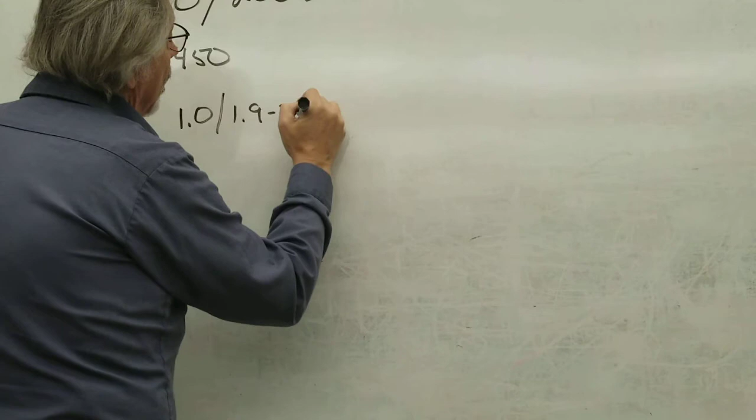3450 RPM. Okay, the RPM is 3450, okay. What else we got on there? Amps is 1.0 slash 1.9 to 2.0. Okay, so the amps are different because depending on the voltage you're wiring it to, the amps are gonna go up. That makes sense. Higher the amperage, the lower the voltage. Higher the voltage, the lower the amps. Ohm's law. Yeah, Ohm's law. Okay. That is correct. What else you got on there?

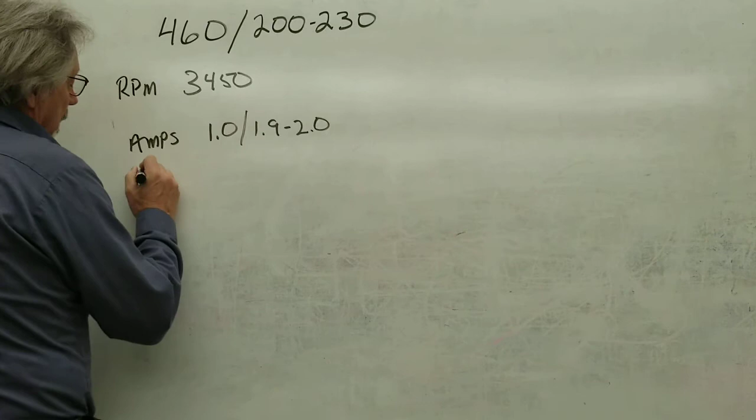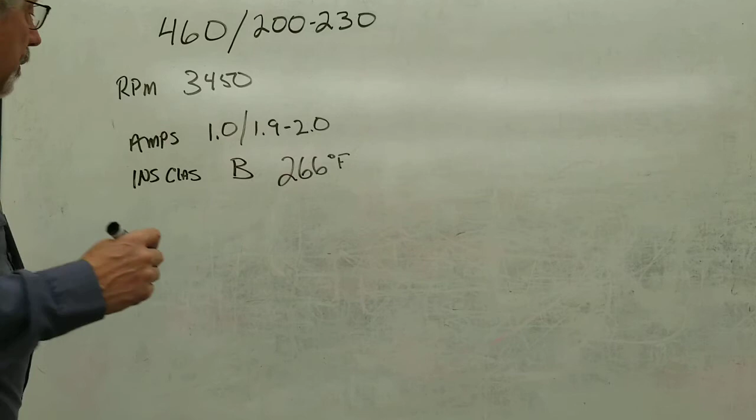Class B insulation. Oh, look, Class B. Seeing all that stuff there. Class B, huh? So what's the temperature? What's the maximum temperature on Class B? It's 266 degrees Fahrenheit. Okay. What else we got on there? Says half a horsepower. Half horse? Yeah, half a horsepower. 1/2. Okay. Anything else? What else would be important on here?

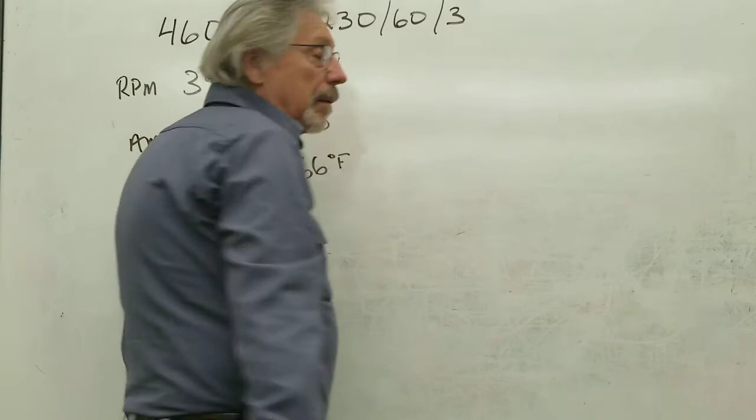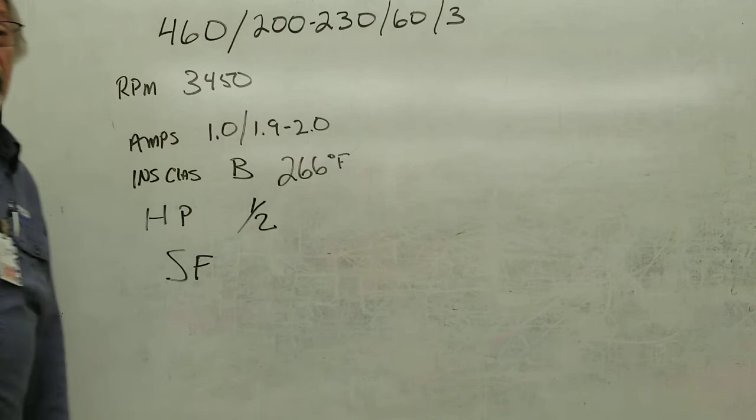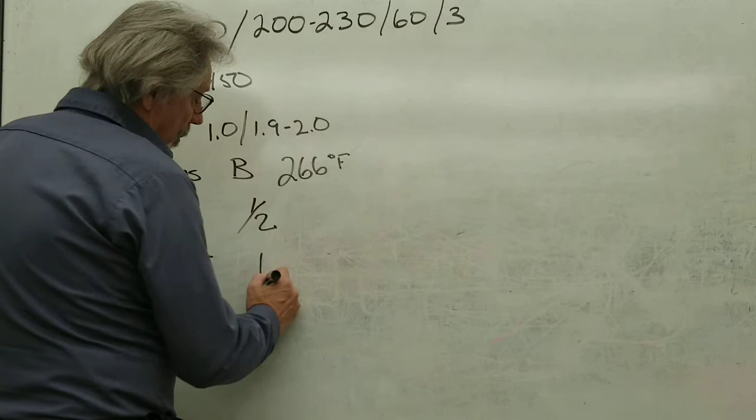I don't know. Got the insulation class, got the service factor, got the what? This would be a three-phase regular. This right here, let's see, yeah, that. I think one of those. And then 60 hertz. 60 hertz. Slash 60 slash 3. How's that? Is that better? Yes. Service factor on there? Should be. What is the service factor? SF. 1.60. 1.6? Yeah, 1.6. Okay.

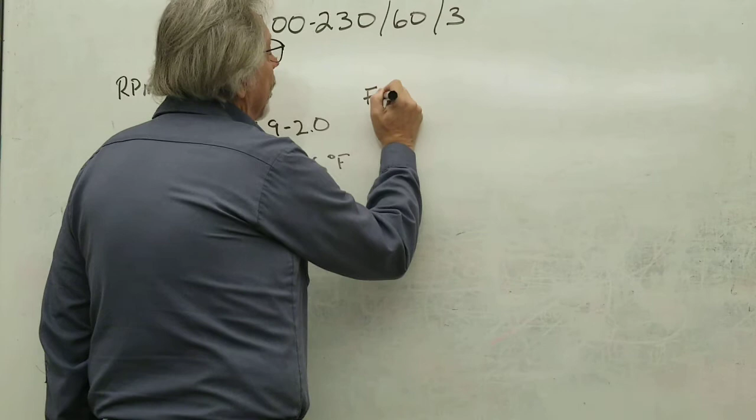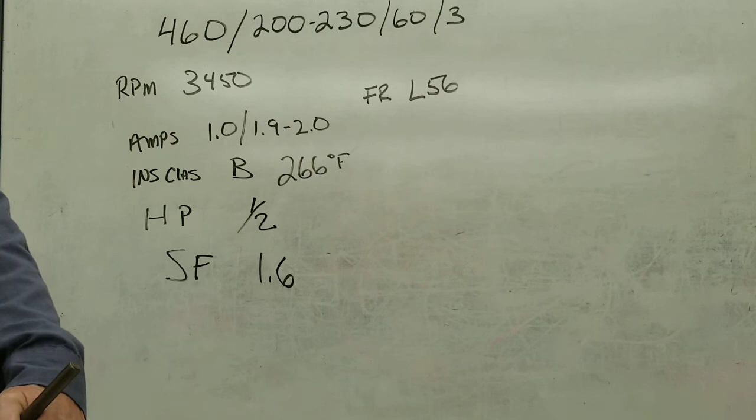You find enough stuff on there? The frame size on there? Was that 56? L56. Says FR. Frame is L56. Frame L56. Anything else on there? Okay. That good? You got a lot of information over there? Yeah.

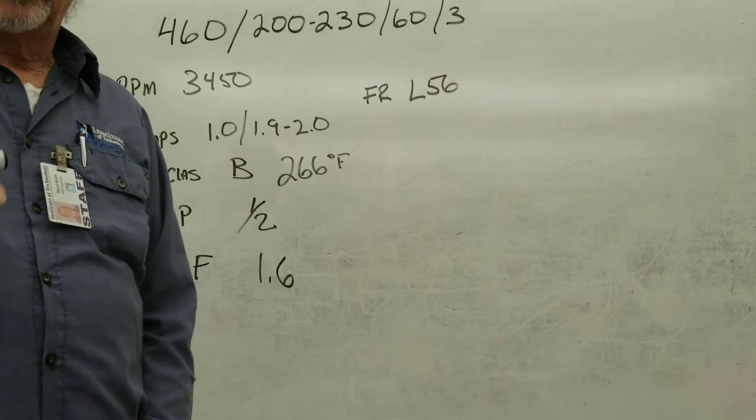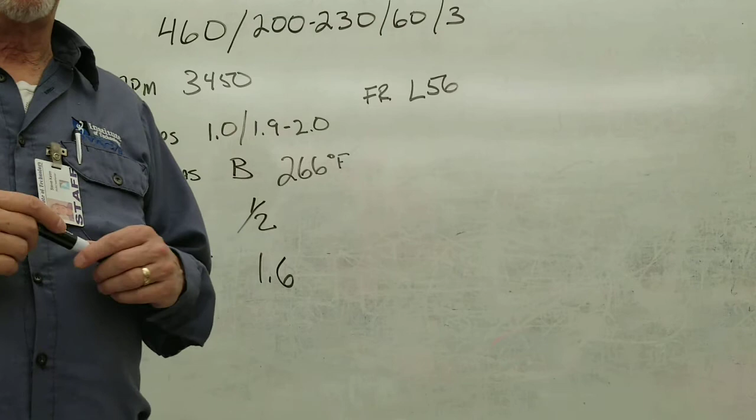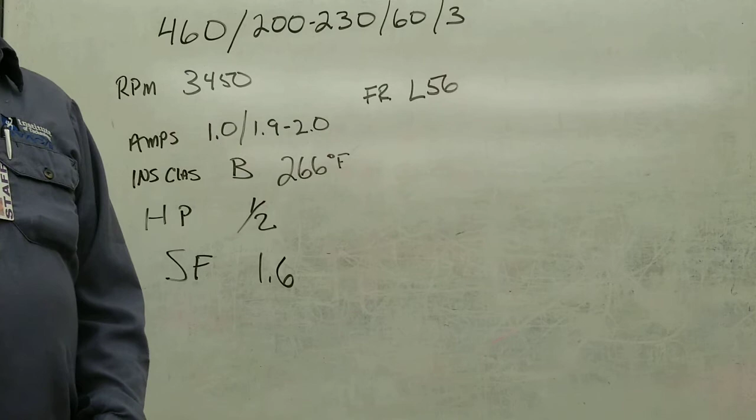Okay, so the frame size, 56, so the 56 frame motor, the dimensions on that motor are up there on that chart back there. So every motor has a frame size, that frame size tells you what size the shaft is, how big the motor is, how tall the motor is, the bolt pattern on the motor, how long the shaft is, all that stuff, and all the measurements of that motor are on that frame size. So that's for mounting. It tells you everything on that motor that you need to know as far as the mounting. Now, as far as the electrical characteristics, that's where we come into the voltage, the RPM, the amps, insulation class, the horsepower, and the service factor.

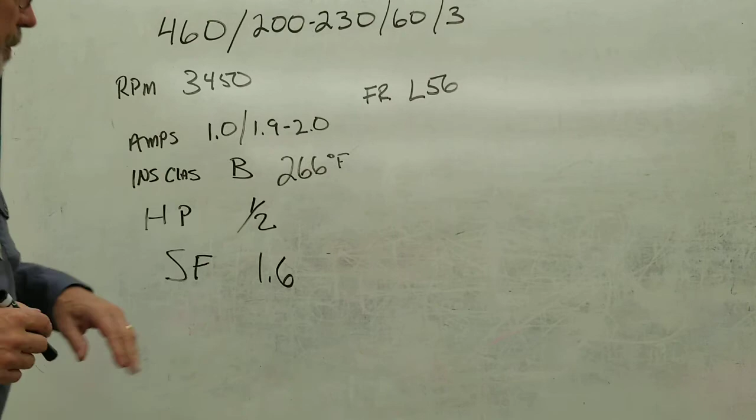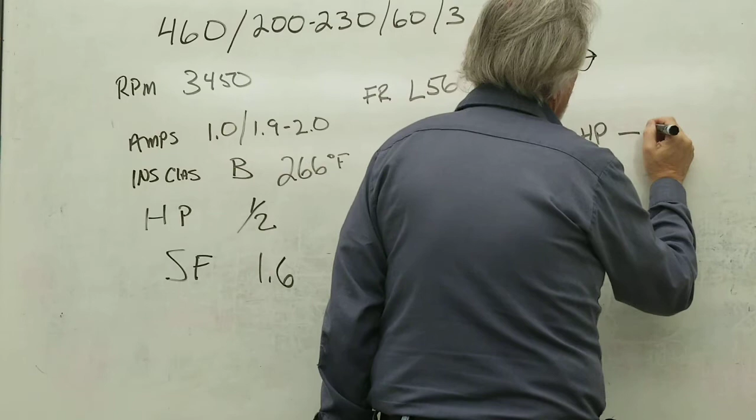Now, the service factor is the reserve horsepower. Reserve horsepower is the service factor, the SF. Okay? So let me explain this to you. If you're gonna replace that motor, you got all this stuff and you matched everything up, but you did not think to look up the service factor, and suppose it was like the one that was on the PowerPoint, 1.0. So when you buy that new motor and stick it in there, it's not gonna stay online. I know, I've done it many times. Okay.

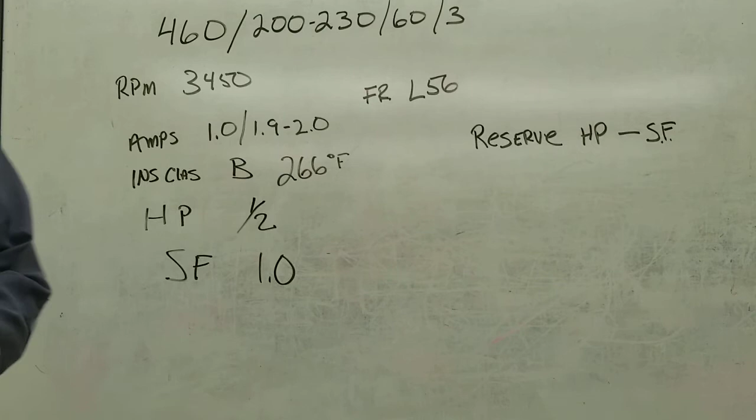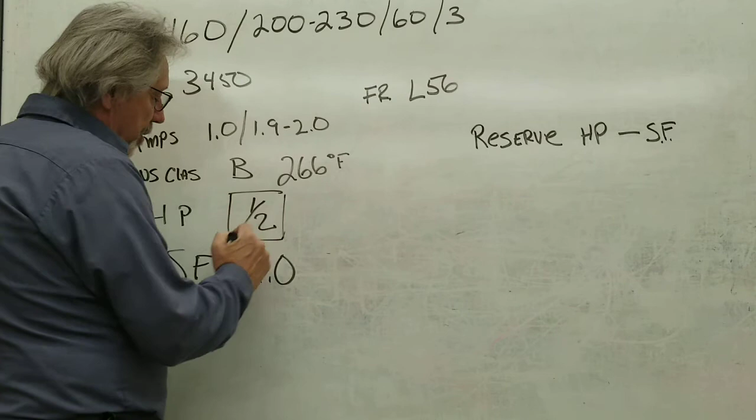Air conditioning manufacturers will do this purposely. They'll purposely put in a motor that you can match everything up, but your motor that you matched up is not gonna work, because they want you to buy the motor from them. Okay, makes a lot of sense. So the service factor, the reserve horsepower, what's our horsepower? Half horse, here it is, right here, half horsepower. So that means the one you put in is a half horse. Guess what the one you took out is? You don't have to guess.

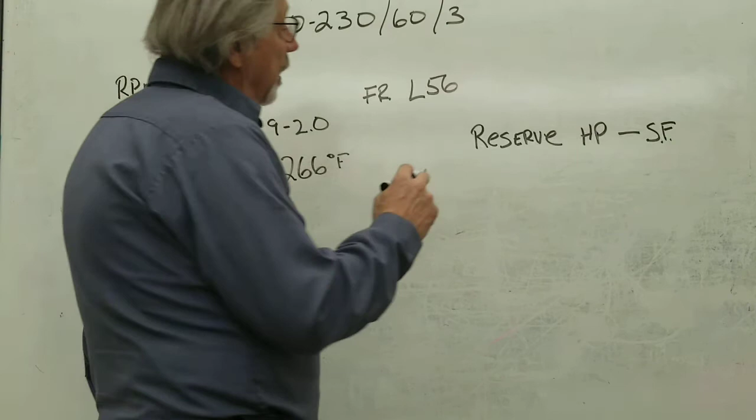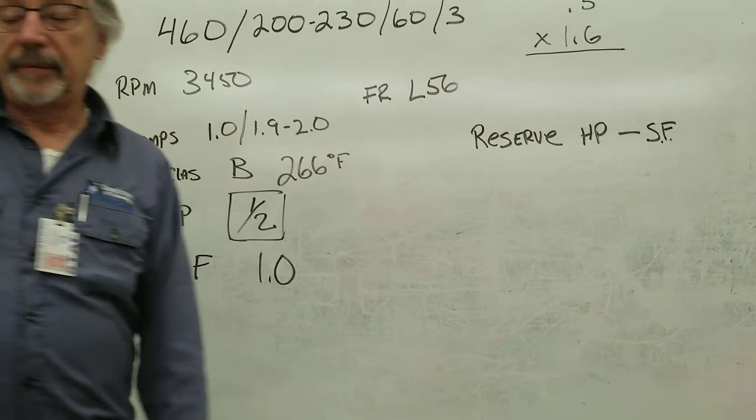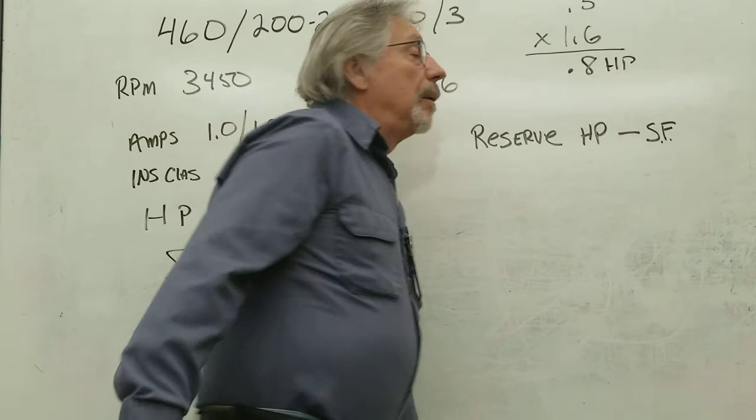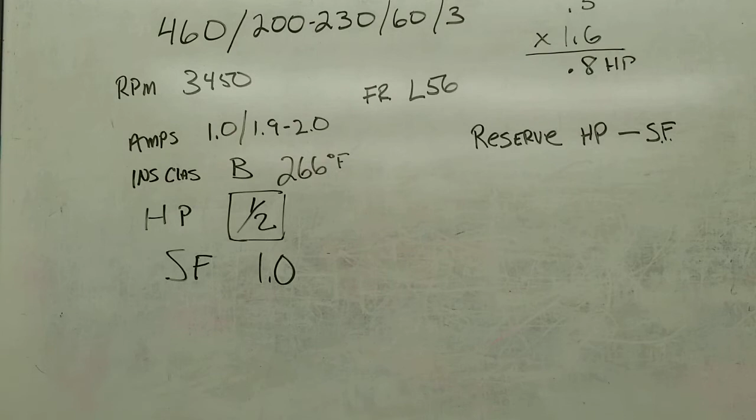Your 1.6 times 0.5 is equal to what? 0.8. 0.8 horsepower. Okay, so that motor that's floating around here is a 0.8 horsepower. So what are we gonna replace that with? 0.8 horsepower? They don't make 0.8. 3/4? 3/4, huh? I'm not sure. I'm just spitting out numbers right now. So 1 horsepower? 1 horsepower. Because what's a 3/4 horse?

0.75, right? Okay. So you're still a little bit under if you went 0.75, right? Yeah. So you want to go to a 1 horse to replace that half horse motor that you took out. Isn't that amazing? Would that be fine doing it with other stuff too, or is it just with smaller horsepower motors? No, it's actually bigger motors too.

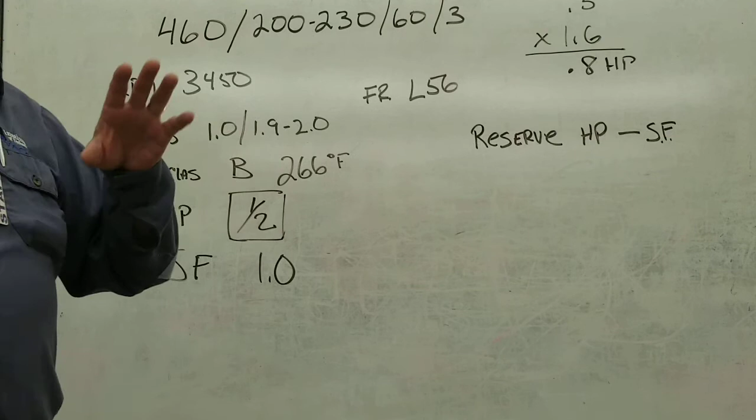A lot of times, like I said, they won't specify on the motor, because when the unit manufacturer says to the motor manufacturer, I want to order 10,000 motors, and these are the specifications I want on this motor. I want them to be half horse, but I want a service factor of 1.6 or 1.5. That's the service factor I want. I want this voltage, I want this. And they'll do that.

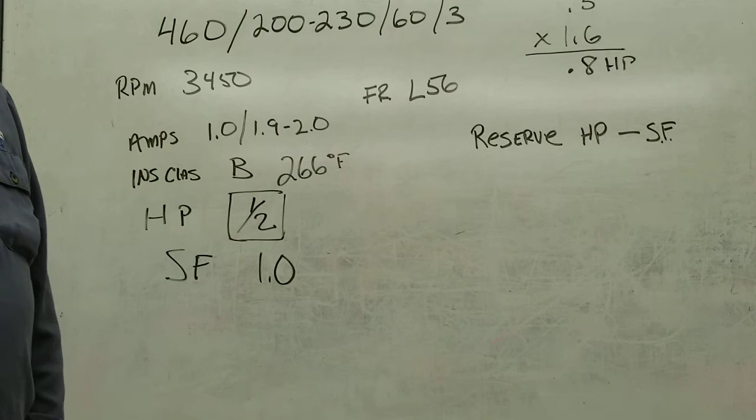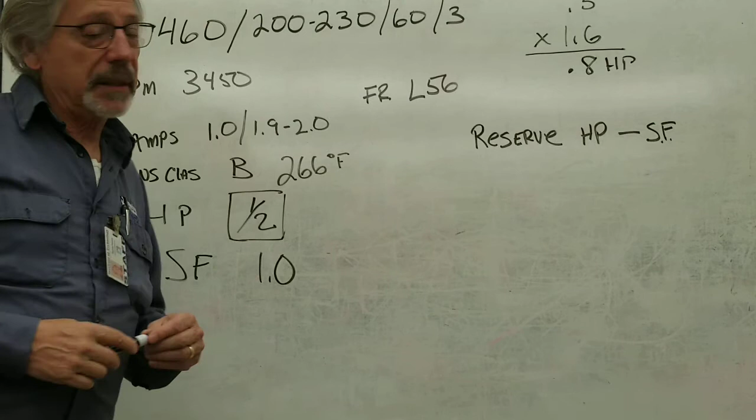And so when you go to replace that motor, unless you get the service factor, and unless it says on there the service factor, you're going to run into problems with that. Big problem. Because they want you to buy their $300 motor, when you can go down and buy a half horse for $60 aftermarket, right? And this has happened to me where it was actually a 5-ton Trane unit over,

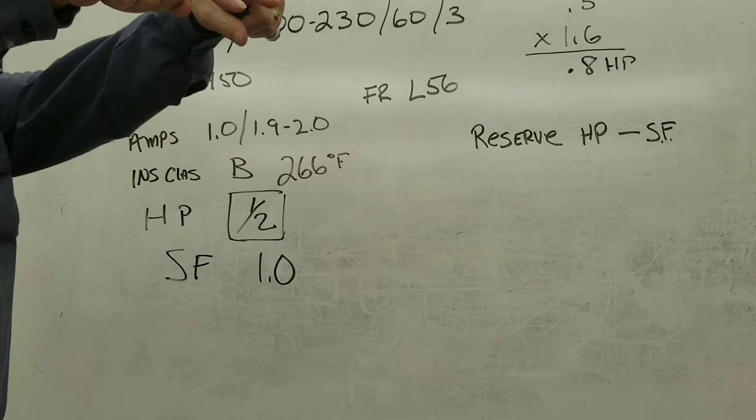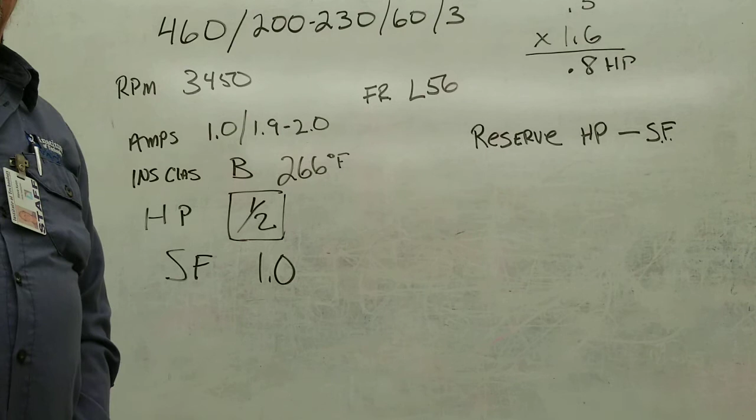Okay, so I was there one day and I checked the motor, it was burnt out, and I go, oh, okay, it's a Trane unit, whatever. It was a 3/4 horsepower blower motor, so I went and got a 3/4 horsepower blower motor in town. I was back there the next day. Same thing, motor was hot, wouldn't stay on because it went off on the internal. Well, I take it out and take it to a motor shop and say, what is this?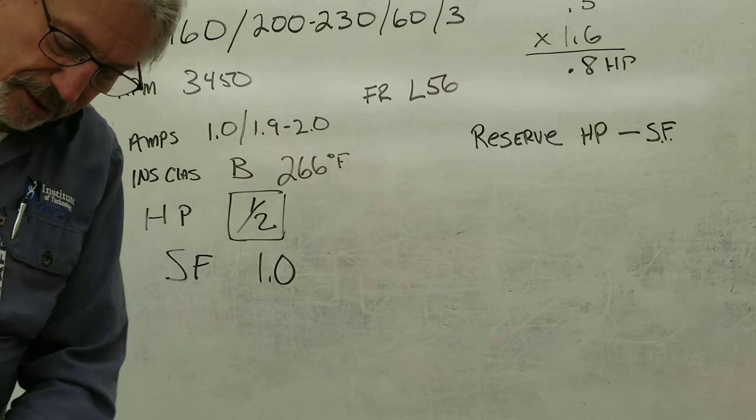He pulls it apart, looks at it and goes, well, what you have here is a heavy duty 1/2. I said, well, what does that mean? He goes, it's heavy duty. Do you have one? He goes, no, I don't have one with that size shaft. You're going to have to go with a 1 horse to replace it. But finding one with a 1/2 inch shaft is going to be a problem. Most 1 horses have a 5/8 inch shaft. So it's not going to fit the wheel. And maybe it's bigger too, it may not fit in.

Okay, let me check around on this. So I went to another motor shop and said, do you have a motor with this specification? I need a 1 horse with a 1/2 inch shaft, this many RPM, all this stuff. And he goes, let's look it up. He finally found one, and the motor was about $165. By the time I've already gone to this point, I said, you might as well just give it to me then, I'll take it.

So I go back and put that motor in, and I did it just out of spite, because of Trane's proprietary nonsense. Trane is like Apple. So I replaced it with a 1 horsepower, but their blower motor, if I would've bought it from Trane, would've been 300 something. So I really didn't save any money, because I'd been out there a couple times already. But I knew that, I was going to go for it anyway. It took me a while, but I got it done. Okay?

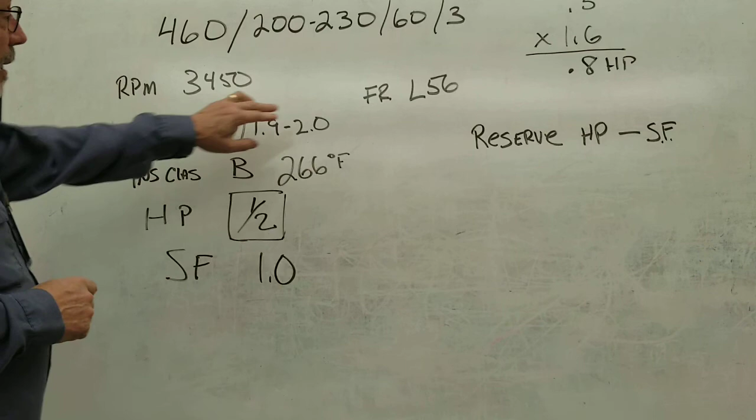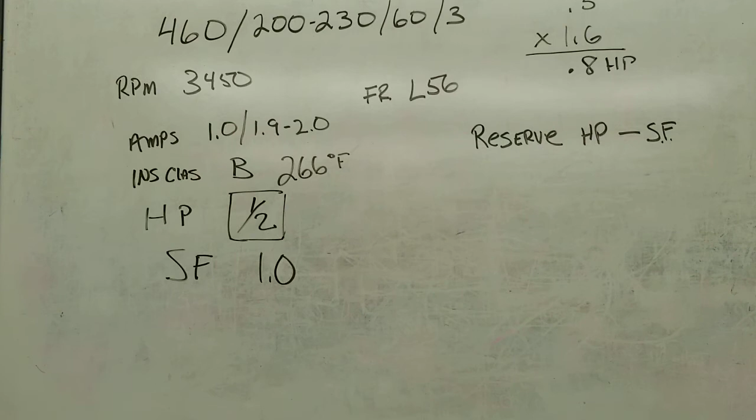Alright, so the amps, we got that. Covered the horsepower and the service factor, right? And we're also going to look at the frame size. This is important to look at: the voltage. Especially on compressors, because compressors are pretty expensive. You don't want to order a 240 volt, 3-phase compressor when your power supply is 460.